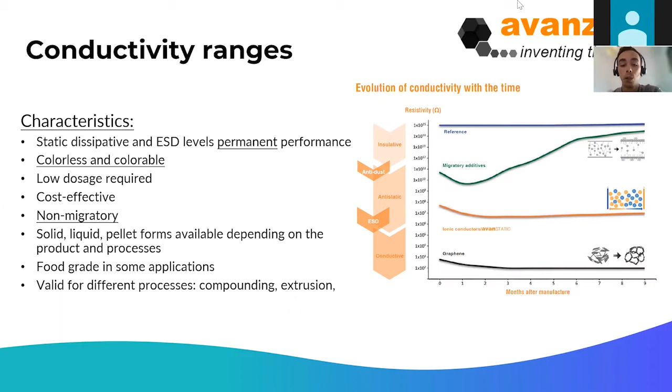I would like to start with an overview of one type of antistatic additives that we have for plastic, which is the range of avanSTATIC additives. They are characterized or also called IDPs, inherent dissipative polymers. And basically, these are additives in pellet form that allow for the creation of an electrically dissipative network inside of

polymer. This can be different to other additives we will see in the following slides, as the other ones have the characteristic of dispersing completely within a material. This is different with the kind of Avanzare. Most importantly, because of the polarity of some polymers, it is not always possible to change the polarity of such polymers in the way that we can reach such resistivities, simply because of the nature of the polymer itself, and therefore we have to work with

what is called IDPs. And the IDPs characterize themselves for being a polymer with such conductivities that in a way is compatible enough and also not compatible enough with the material, in the sense that it will create a network inside of such polymer without breaking their bonds or their channels, and without dispersing completely. Otherwise, we would lose this effect.

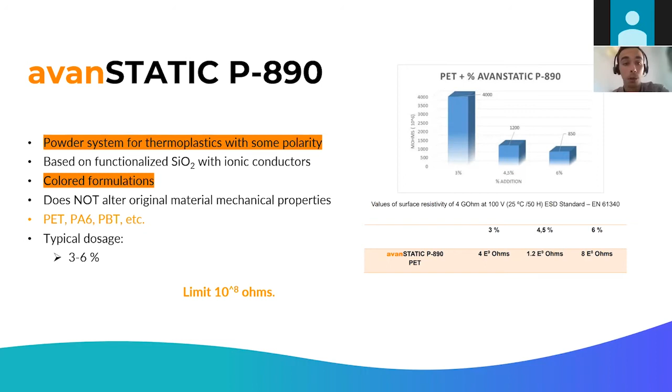Examples of applications and cases will, of course, vary a lot throughout industries. We can highlight, for example, different kinds of film bags for electronics, which by default need ESD characteristics in order to avoid compromising the electronics themselves, and this can also apply to sheets for the thermoforming of different ESD trays for electronics. Also, different IBC tanks may require antistatic performance in terms of safety.

Cables, different kinds of wheels, different kinds of flooring tiles for clean rooms or different scenarios, different kinds of extruded profiles, plastic sheets, different kinds of pipes, like the one on the bottom right, even in the case of a pipe for food processing. Of course, we also have antistatic additives for food contact, or different kinds of mixing tanks, as we can see on the top right.

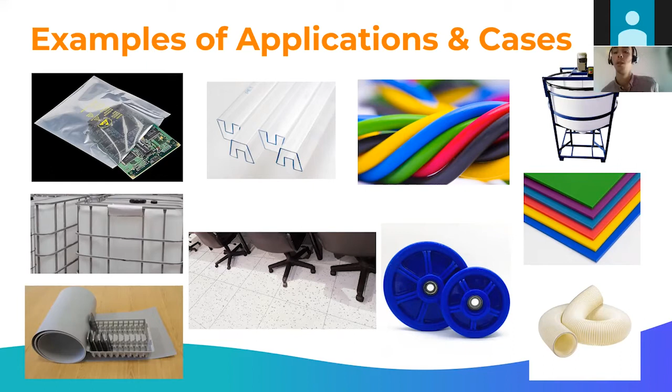These are just some ideas and some of the cases we work on, but logically it will depend on the applications and the industry you work in. In some cases you may need antistatic performance, in some cases you may not, but it will depend, of course, on the particular application and project.

Now we're going to talk a little bit about graphene, its applications in plastics, and the graphene grades that we produce. As I said at the beginning of the webinar, we produce a big range of graphene grades, ranging from grades focused on industrial purposes to others focused on research purposes. When we talk about graphene for industrial purposes, we're talking about graphene nanoplatelets. As we know, graphene is called a wonder material. It was discovered in 2004, and it gave its inventors the Nobel Prize.

It is basically a 2D sheet structure of carbon atoms arrayed in a honeycomb array in a 6C form. When we talk about graphene nanoplatelets, we're talking about carbon sheets of more than 10 layers, while with other graphene grades we're generally talking about graphene sheets of less than 10 layers, getting to the point of only 1 layer.

Logically, in order to scale up the process and make it accessible to industrial markets, sometimes it is sufficient to work with graphene nanoplatelets to achieve the desired effect. But in some cases, especially in new industries that are really researching the properties of graphene in different applications, we can be talking about pristine graphene, highly reduced graphene oxide, partially reduced graphene oxide, and of course we also produce different kinds of dispersions and master batches.

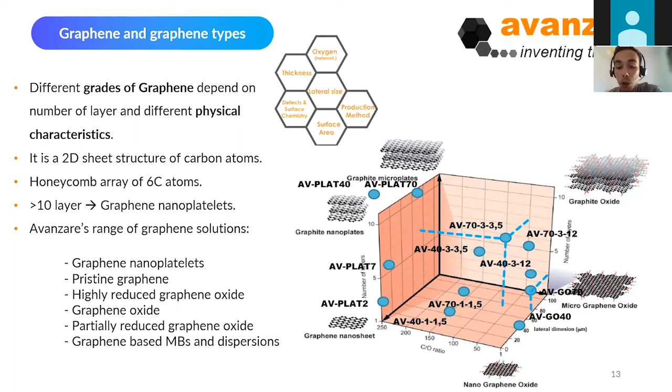Generally speaking, it is possible to characterize graphene depending on different characteristics like the content of oxygen, its thickness, its lateral size, the production method, the surface area, the defects and surface chemistry, and logically the different characteristics of each grade will be better for one material or another, for one purpose or another. For example, when we're talking about thermal conductivity, the larger the lateral size, the better. But it will depend on what you want to achieve, of course.

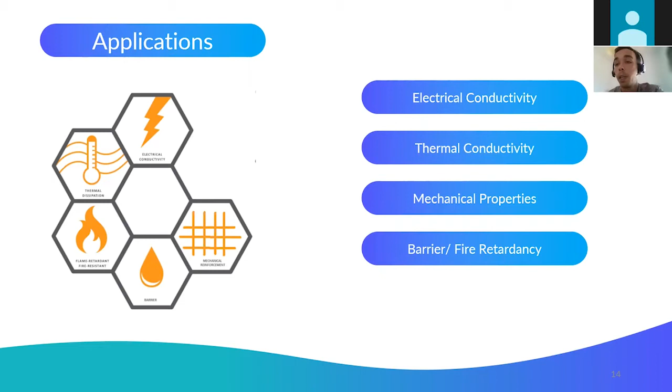From an industrial point of view, the main applications or the most interesting characteristics that graphene can provide with different polymers are mostly focused on electrical conductivity and thermal conductivity, mechanical properties, or different types of barrier or fire retardant properties. This doesn't mean it is not being researched, especially at the R&D level, for other kinds of applications and characteristics, but this is mostly the focus when we're talking about applications for plastic or industrial applications.

Of course, as I said at the beginning, this can be desired or not in some applications, but particularly it's interesting when you want to achieve very low resistivities. And as with conductive carbon black, we have to keep in mind that this is a black material.

We can also develop different kinds of master batches and have different standard grades of graphene-based master batches to basically facilitate its dispersion in different processes, particularly when we're working with graphene in powder format. It can be tricky if you're not experienced or don't have the right equipment to disperse it. For this reason, in order to make the life of some of our clients easier, we have developed specific master batches which allow them to integrate them into different processes and materials.

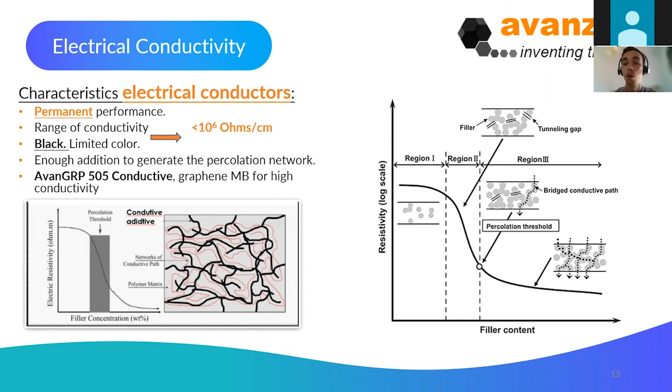A little bit more about some of the graphene-based master batches that we have. It is worth highlighting that they can be suitable both for conductive and ESD performance. They are PAH and halogen-free. They have a low impact on the key mechanical properties, and they're effective and stable under different humidity conditions.

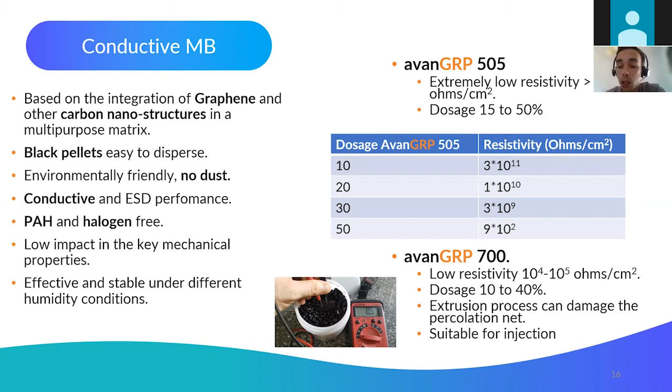For example, one of these grades is avanGRP 505, which can allow you to reach resistivities around 5 ohms per square centimeter. The dosage will range, for example, from 15 to 50%, allowing you to reach resistivities as low as 10 to the power of 2. Another grade can be avanGRP 700. This is more suitable, for example, for injection, and depending on what you want to achieve, it will change.

And of course, it is always important to highlight that graphene should not only be viewed as a replacement for conductive carbon black, but can also be used for other purposes within the same application. For example, if you want to partially replace conductive carbon black or other conductive materials in order to compensate the loss of mechanical properties, or if you want to look for a synergistic effect, for example, in order to reach lower resistivities and so on.

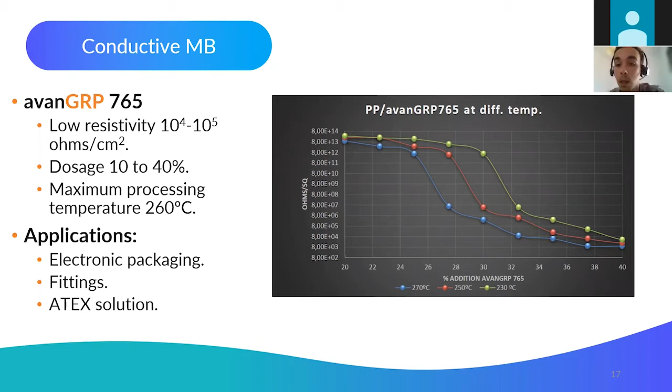When we talk about thermal conductivity with graphene, and personally speaking, this is one of my favorite applications for this material, we have selected different graphene grades characterized by a bigger lateral size, which allows for better thermal conductivity. We mostly work with avanTHERMAL CONDUCTIVE 440. This is more suited for industrial grades, and the dosage required to increase the thermal conductivity of a polymer can vary between 3 and 16%.

While we still scale up the production of some other grades, another interesting grade to look into, particularly for research purposes, can be avanTHERMAL CONDUCTIVE 770, which also has a higher performance. As with the other graphene grades, they are also halogen and PAH free, and have a low impact on the key mechanical properties.

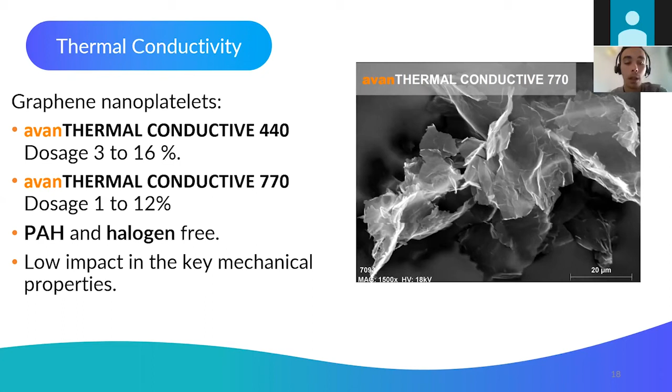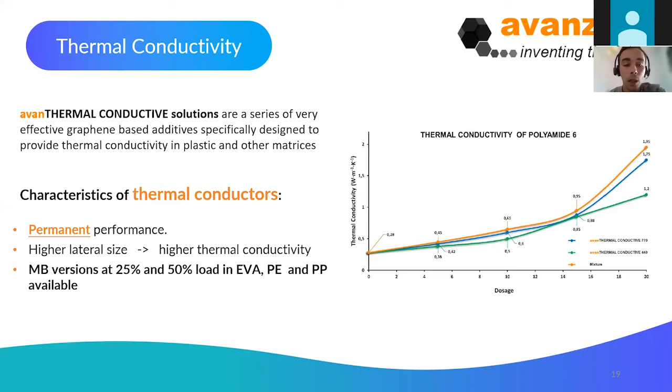The performance is logically permanent, as with the electric conductivity, and we also have master batch versions of this product. It can be loaded, for example, in different carriers such as EVA and different types of polyolefins, and we're talking about loadings of up to 50%, of course.

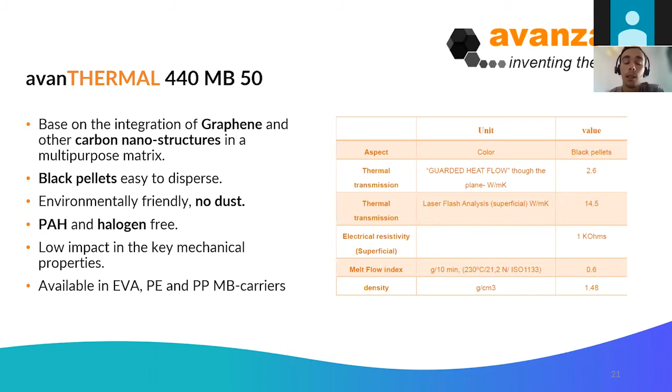As I explained, avanTHERMAL 440 master batch 50, for example, is a master batch solution of this thermally conductive graphene, and it can be prepared in EVA, polyolefins, or many different polymers you may require. Here are some of the characteristics of this material. But as I said before, if you have any particular requirements, it is best to tell us directly what you want to achieve rather than selecting from the information I'm giving here.

Another interesting material that we have as an alternative to the range of graphene-based Avanzare conductive is Avanzare 300. This is a colorable alternative for thermal conductivity properties. It is based on a mixture of different metallic oxides, and it is important to highlight as well that it will not provide electric transmission.

When we talk about graphene, we also have to logically consider that at some point, when we add a thermal conductor, we will go through the percolation threshold, and we will also have some electrical conductivity characteristics. Of course, there are different ways to have one property and not the other. But if you're looking for a colorable alternative that also does not give any kind of electrical transmission, Avanzare 300 is a very interesting material to look at.

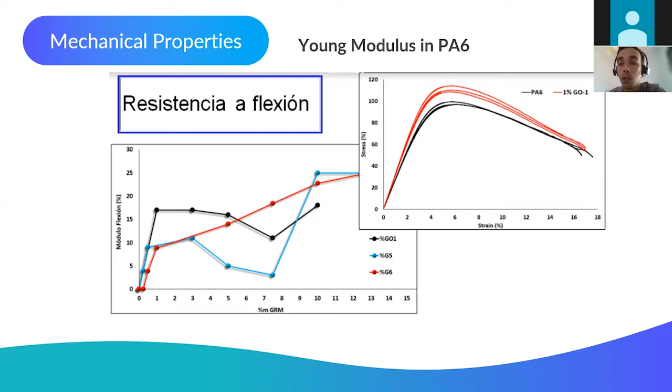In terms of mechanical properties, logically, this will vary a lot depending on the material and the application you're working with. It is worth highlighting that when we're working with graphene for mechanical properties, the dynamics in terms of dosing are quite different. For example, if we want to increase the Young's modulus or other mechanical properties of polyamide 6, we will have the best improvements at very low dosages, generally below 1%, or in some cases with just 0.1%, you will have a very interesting increase in different types of mechanical properties and in different polymers.

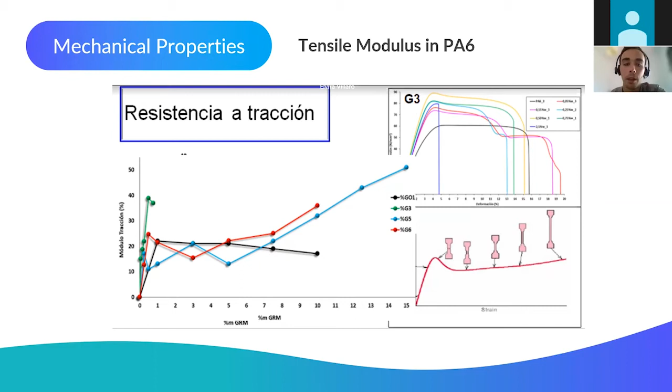The same goes with the tensile modulus. In this graph, we can observe how at extremely low dosages below 1%, you are already increasing the tensile modulus by 40%, which is quite incredible considering the improvement and the low dosage of the material we're adding. Other improvements in mechanical properties can be observed in impact properties, for example in PP, also at very low dosages. In this case, you can observe an increase of 270% in impact energy in PP, and so on.

Of course, if you want to research the effect that graphene can have on mechanical properties in your material, as usual, it is best to tell us exactly what for, so that we can recommend the best grade and even give dosage suggestions, processing suggestions, and so on.

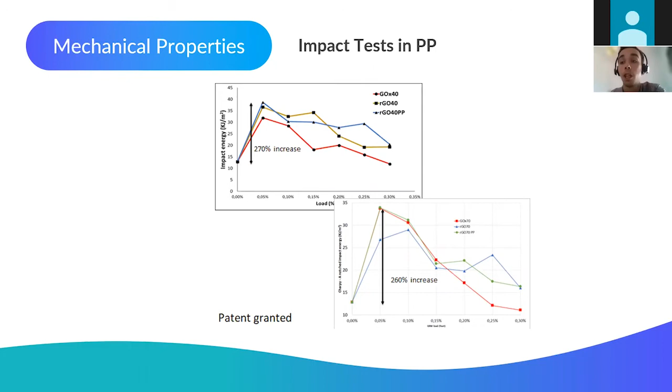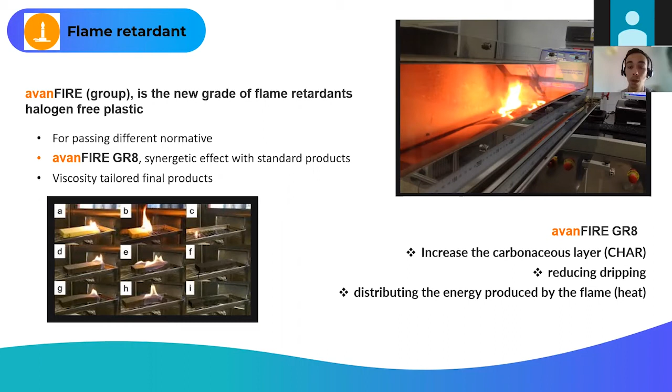Because of the good thermal conductivity characteristics of graphene, it is logically a good material to help in terms of flame retardancy properties. For example, we have one grade, avanFIRE GR8, which works as a synergist with conventional flame retardant packages. I would not generally recommend this as the standard and only flame retardant additive for an application, but rather as a booster of those packages that you may be already using. Particularly interesting, for example, when you need to comply with a particular norm and you're not able to achieve this with conventional flame retardant packages based on polyphosphates and so on.

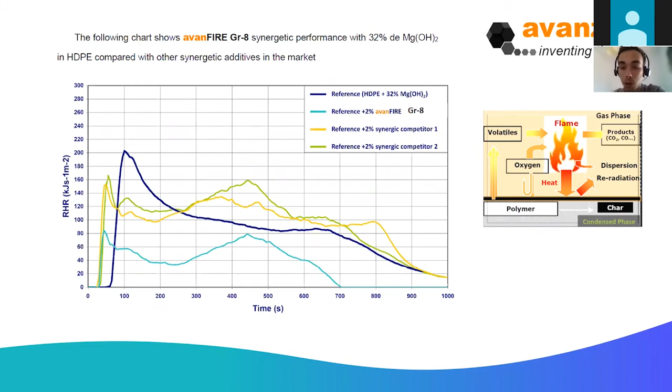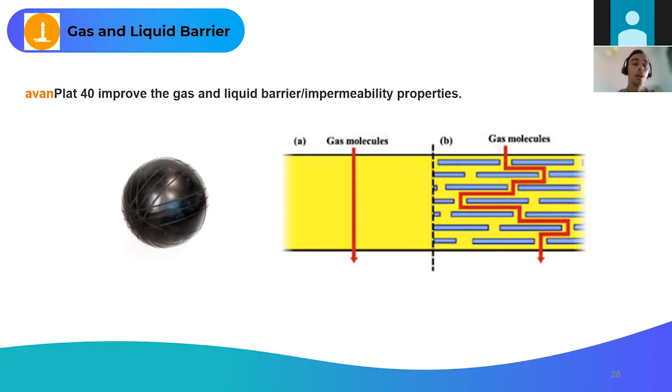We have also improved, and some of our clients have also observed that some of our graphene grades are very interesting when we want to increase the gas and liquid barrier or impermeability properties. For example, in this picture, you can see a latex ball, which goes inside of a football. By adding a small dosage of graphene, for example avanPlat 40 at 5% or less, they were able to have very interesting improvements, especially in this case for gas or air impermeability, but in other applications you may want to improve the liquid barrier or impermeability properties.

Moving on to another topic, our range of products of avanSAFE Detector. As I explained at the very beginning, this is an additive in powder form. It is based on stainless steel alloy, and it is designed to impart detectability by metallic, magnetic, or X-ray methods. This is a colorable alternative to a material you may be more familiar with, ferrite, which can also help you in such cases, but it's not that suitable because it will turn your product black. In applications where you want to give such properties to plastics, it is important to be able to color the material.

This is particularly important in food production processes, where it is very important that not a single piece of plastic of whatever is in the plant, which can include the conveyor belts, the pens of the operators or any other plastic piece they carry, or any other tool or utensil used in that production line. Over time, either by accidents or by degradation of these materials, you have the risk that a small, tiny piece falls into the line, which is very undesirable, as it may end up in the final product. And no one wants to find a piece of plastic in a food product.

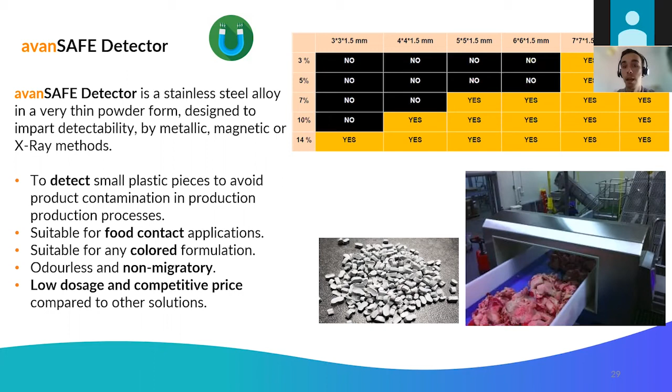So when speaking with a customer about this, especially when they're new on this, it is very important to define this. And logically, how the detection machine is calibrated, for example, and the metallic spheres that are used to calibrate such detection machine will also have an influence. And logically, when we're looking for very small pieces, in some cases, if we set the detection machine into extremely high sensitivity, we may also fall in the risk of having false positives, even from a little extra oil that may fall in the line.

Different applications for avanSAFE Detector in detectability. As I said before, everything that can be used in a food production line or a plant, and this can vary as tanks, buckets, different kinds of ties, different kinds of pipes. Especially, for example, pipes may be susceptible to internal degradation and the release of pieces of the pipe itself over time, and so on. Even card holders, pens, absolutely everything that may be used in that production line.

Furthermore, similar grades to avanSAFE, also based on stainless steel, may be used, for example, to amplify the density of a plastic. There are different reasons why you may want to achieve this in particular applications. They may be as simple as to avoid that the plastic floats, but in other cases it can also be used in applications where you want to improve the appearance of a product. This can range from increasing the weight of a casino chip, just so that it looks heavier and better, to different kinds of luxury packaging.

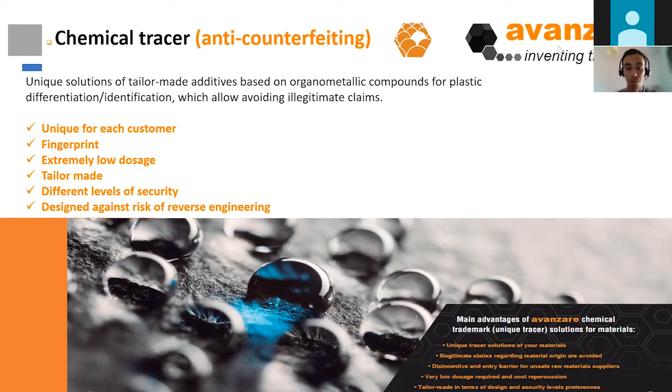A little bit about biocides now. We have registered, of course, our biocides in Europe, and they are also registered at the national level, for example in Germany, and we work with different technologies. Today we will be talking mostly about our two main products, which are ZnO Bac and AvanSilver Bac. ZnO Bac is a powerful biocide agent, especially formulated to be introduced in plastic matrices. It is based on zinc oxide and zinc pyrithione, and depending on what you want to achieve, it's very important to define with the client.

Generally speaking, when we're talking about biocidal action, you may be looking for an antibacterial effect, an anti-fungi effect, an anti-algae effect, and logically the tests that you have to pass are also different. You may also be looking for an antiviral effect. You may also want to achieve, for example, an antifungal effect, which will derive in an anti-odor effect, for example in shoe soles, where one wants to eliminate the fungal smell of soles generated by the growth of fungi.

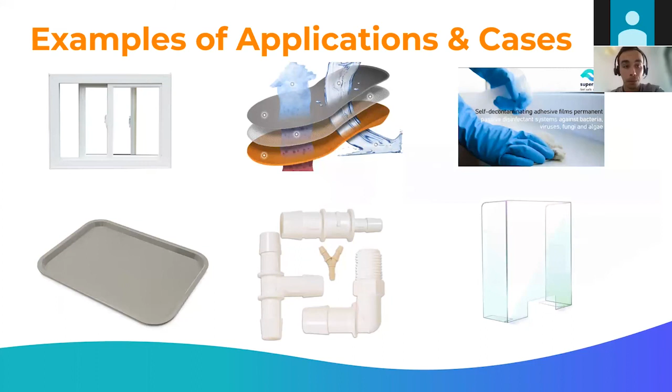Lastly, I also wanted to highlight the capabilities of Avanzare in terms of our antimicrobial laboratory. Here we can carry out different tests. The most common, at least with the clients I work with in Europe, is the ISO 22196, but of course we can also carry them out according to the Japanese standard, which is the one that was used as the basis for the former one I just mentioned. There are different kinds of tests that we can carry out. For example, the Kirby-Bauer qualitative test, quantitative methods for the determination of minimum inhibitory concentration of microbial growth, and so on.

Lastly, as an overview and as a starting point for other topics, I also wanted to highlight other additives we have worked on in the past, just to transmit to everyone who's listening today that we are more than happy to listen to every technical challenge one is working on, in case we can help them either with something that we already have or something we could develop, if it logically fits the focus in terms of chemistry of the topics we work on.

For example, we have developed different kinds of additives for anti-fog properties, laser marker properties, oxygen scavengers, IR absorbers for PET, outdoor UV protectors, PC light scatterers, coupling agents, photocatalysts, anti-odor, anti-block, and so on. Tell us whenever you need something in particular. Of course, there are some topics we focus on, principally providing electric conductivity, especially at the ESD level, to different materials. But as you could see through this presentation, we're open to any challenge, and look at us not only as a developer and producer of specialty additives, but also as an R&D platform to support you in solving different kinds of technical problems.

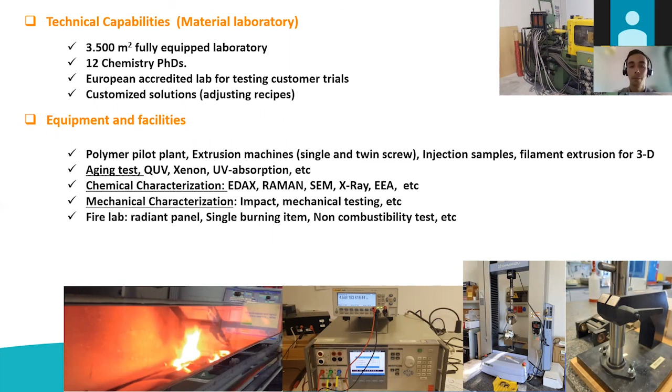For example, we also have an antistatic laboratory where we can carry out all kinds of antistatic and resistivity tests under the particular norms that are required to comply with, or the conditions in terms of humidity, temperature, and so on. And of course, we have a large number of other laboratory departments to analyze different aspects. For example, Ensatec is also part of the Avanzare group. It is an accredited certification lab for building materials, where on a daily basis we're testing all kinds of building materials, from windows to everything that may be used in construction.

And logically, this also gives us the capabilities and the equipment to test other things not accredited. For example, fire tests in other kinds of applications like cables, not necessarily accredited, but we have the equipment, and when we're working with a client in developing or boosting the flame retardant properties of a particular project, we can also help them in testing it, just to make it easier for them, of course.

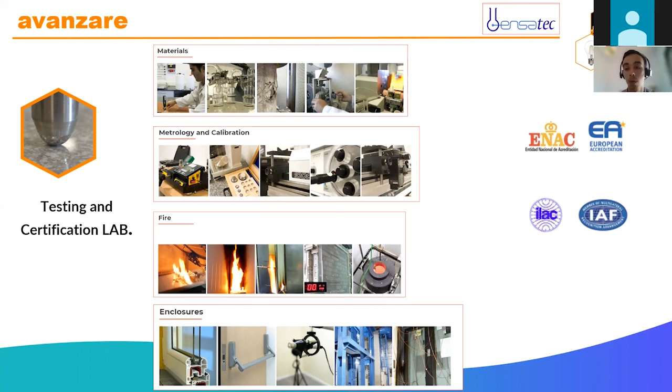So I would like to thank you for your time and for joining this webinar. As I said, I hope this is a starting point, also an opportunity to brainstorm, to give you ideas from both a technical and a sales perspective.